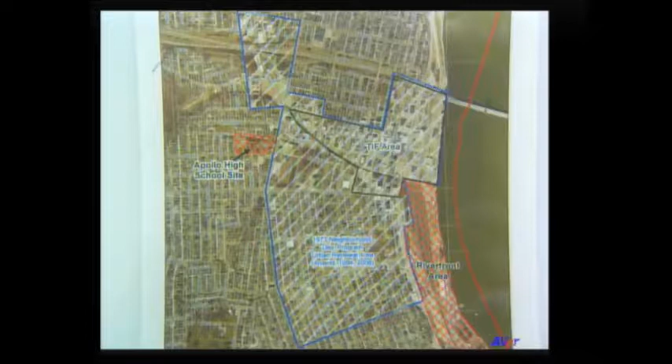There was a discussion at that point about whether that should be for the downtown area or citywide. When we looked at this and presented the area, there were a couple of communities that had something comparable - Davenport would be one. If you look at their policy, the timeframe, the abatement on that 10-year basis, and the percentage by year, this matches that.

They do their downtown corridor, or downtown area, and then they have 2 highway corridors - one extends north out of downtown. I'm not familiar with the other one to say where it is, but what they've done is target areas that need redevelopment. The other communities we saw were typically doing that as well - the majority with an expanded abatement schedule like this were asking how to target areas where development is not occurring, needing something far above the traditional tax abatement.

Even at that time, there was an argument over whether this should be citywide or not. But regardless, when Tim suggested expanding the downtown area, what's up on the board in red hashed would be the idea of expanding that tax abatement plan to include that area as well, and the developer is certainly willing to do that. We don't have to get the tax abatement in place by June 5th, but we do need to be working on it as we move forward.

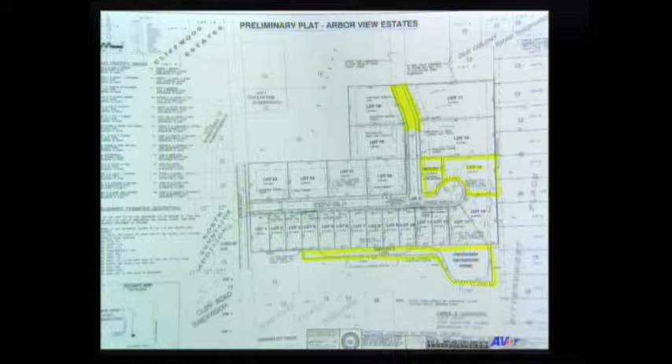Mr. Tisdale: This is a request by Scott Zeiser, developer of Arbor View Estates. This was previously approved for a PUD and preliminary plat last fall and winter to do a new residential development north of Sunnyside off of Cliff Road. He's requesting a few changes to the previously approved plan, which included 14 zero-lot line duplex condo developments where each side of the condo is on its own lot. The 15th lot was a single-family lot with an outlot on the corner of the cul-de-sac, and the road went to the north property line and dead-ended, with a detention pond on the south.

A lot of the amendments to the PUD are based on changes he's requesting in his development. As he got further along in the development stages, doing more survey work and other things, he's requesting to add 2 additional lots on the east side, lots 15 and 16, to the condo development.

That would wrap partly around the cul-de-sac, having lot 17, previously an outlot, become a buildable single-family lot, expanding the detention area to the south on his property to cover all required detention, and having an outlot to the north property line for future street development with a cul-de-sac at that location.

A couple points within the ordinance mean this preliminary plat would have to come back to council as well, but we have to go through the rezoning first to make changes so the plat would conform. So the changes in the PUD ordinance would be going from 14 to 16 attached units on the eastern and southern border of the development, modifying some setbacks to fit within this area, primarily on the front side of the development.

It does get tight around the cul-de-sac, so reducing the front yard setback from 30 to 25 or 20, while maintaining the 25-foot required rear yard setback for lots adjacent to other properties. For lots 1 through 14, shifting the front and rear yard setback: typically the front yard setback on the street is 30 feet and the back is 25. His proposal would change the front yard setback to 25 and the rear to 30, so he's still maintaining the same total setback distance, just with more distance in the backyard.

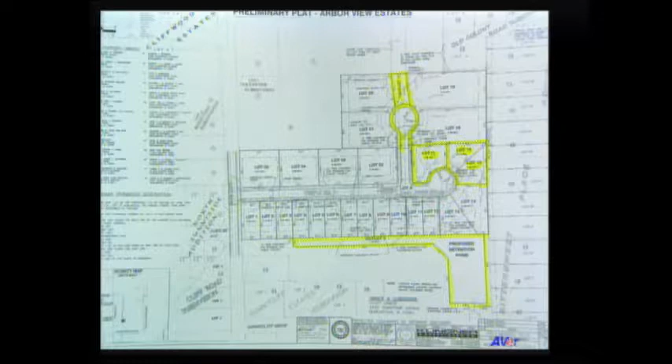It's going to be my question—so it would take an amendment to add that waiver of the sidewalk. But the planning commission, with the changes as shown here, did vote 4-0 to recommend approval of the request to the city council.

Okay, you guys good? I'm good with everything, but I'm not good with the amendment on changing for the sidewalks. So that would take an additional amendment by council to add that in, since it's not currently in the PUD. What was his justification for asking for that?

Do you know? Just reduced cost essentially is the big thing. Yeah, and I talked to him, he talked about it being a low-traffic area, didn't think it was really that necessary. I kind of agree with him. I can understand that. I think Cliff Road currently just has sidewalk on one side of the street as well, so some of the existing neighborhood based it on that.

You guys good? Sure, okay.

Number 7, consideration of an ordinance rezoning the property locally known as 816 Valley Street from M1 Light Industrial to C3 Central Business District Downtown Mixed Use Zoning District, first reading. Mr. Tiffin.

It's a request to rezone the former Dial Building. The portion on the south side, shown here in yellow, is currently M1 Light Industrial. There is a portion to the north that is currently C3, a small portion on Jefferson Street, Central Business District. This rezoning would make the entire property C3 downtown mixed use, which allows both commercial and residential use. M1 does not allow any residential use, so the property could be redeveloped to include residential with this rezoning.

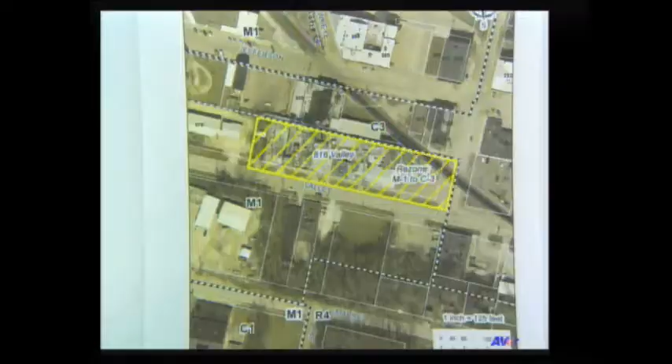So again, just requesting to rezone to allow better reuse of the property. You guys good?

Do you know, do they have a plan in mind? The applicants here are looking to do some residential, different residential uses on the upper stories, at least, I think. This would allow residential or commercial use in the building. Sounds like a good reuse.

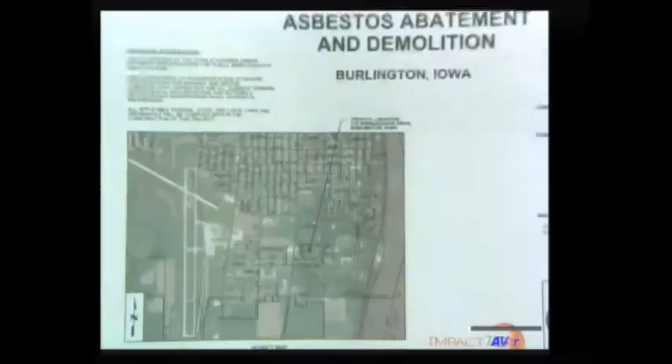Next is a consideration of plans and specifications for the demolition of the property located at 715 Shoquoquon Drive, Burlington, Iowa. This is the former Parkview Care Center located just south of Dankwardt Park off of Madison Avenue and Shoquoquon Drive. The city did acquire this over a year ago, I believe.

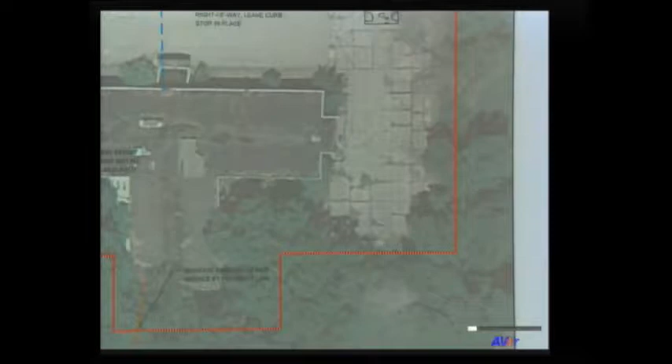We're looking to abate the asbestos and demolish the building, with plans to subdivide into 3 lots for sale as residential single-family lots. Previously, there was discussion about whether to move forward with Apollo, which is kind of why it's been delayed a little bit. Those were going to be packaged as a demo project if that wasn't going to be redeveloped, but since the development came forward, we proceeded with Impact 7G in developing plans for the asbestos abatement and demolition, looking to have bids received by June 1st, 2017, and completion by the end of this year.

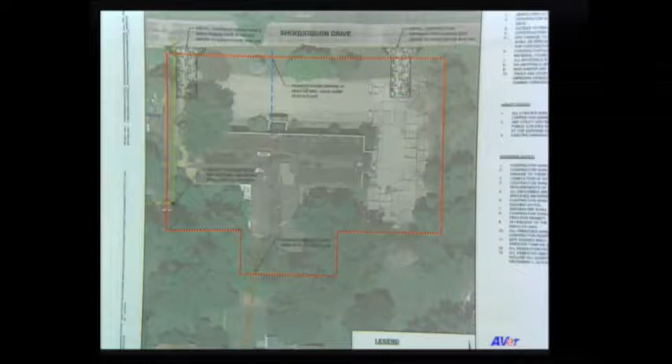Wasn't somebody looking at this building prior, or am I getting buildings mixed up? There's been some inquiries into the building in the past, nothing more than inquiry. Currently it's zoned R1, single-family residential. I don't know that this current use could go back into this area based on current zoning, but it could obviously be considered for rezoning. It's in a state that has a lot of mold, asbestos, and a lot of issues with it.

Cost by Impact 7G shows $391,000. We did have an estimate from a local contractor a year and a half ago, closer to $200,000, so we're going to see what those bids come in at. Currently we have over $305,000 in our fund for these projects.

Okay, council, you guys have any other questions? Good, thank you, sir. Next we have consideration of plan specs for the 2017 Agency Road Widening Project West End.

Just this first one here. So you can see the project boundaries out here. Basically what the project entails is reconstructing Agency Road from West Burlington Avenue out to just short of Highway 61.

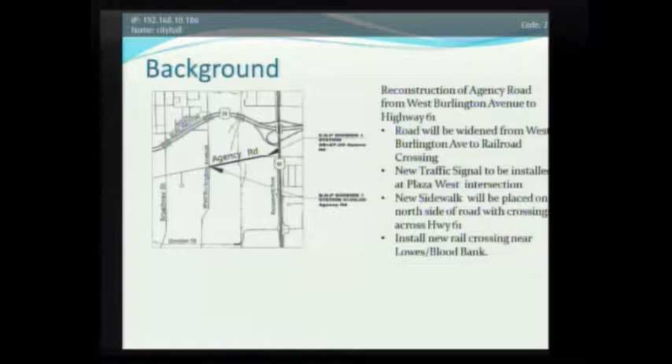A couple of things we'll be doing in addition to the reconstruction that should be noted: the road will be widened from West Burlington Avenue out to just before the railroad tracks where it kind of necks down, so that won't be an issue anymore. A new traffic signal will be installed to replace the temporary one out by Plaza West, which is pretty well needed.

And then we will be installing a new sidewalk on the north side of the road, and we'll actually have a sidewalk crossing across 61 and then down to Walgreens where there's already some existing sidewalks, so we can connect the corridor there.

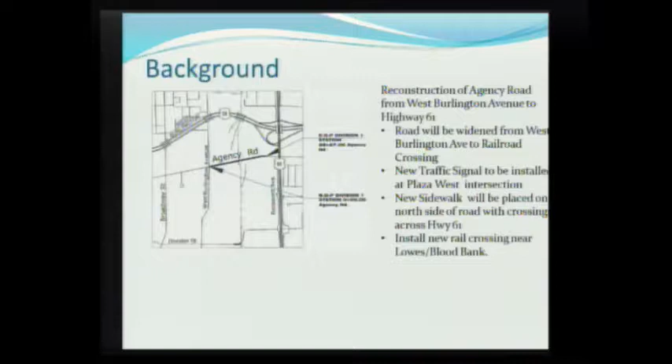Next, and the last thing worth noting here, is we'll be installing a new rail crossing near the entrance to Lowe's and the Blood Bank. The existing one has a little bit of wear on it, but we're replacing it to make it a smoother ride there.

On the next slide I have just a quick picture of what the widening will look like. The darker black line on the top and bottom there is going to be the new road width, so it'll match everything as you move farther to the east. So you'll have 2 lanes in each direction and then a center turn lane each way.

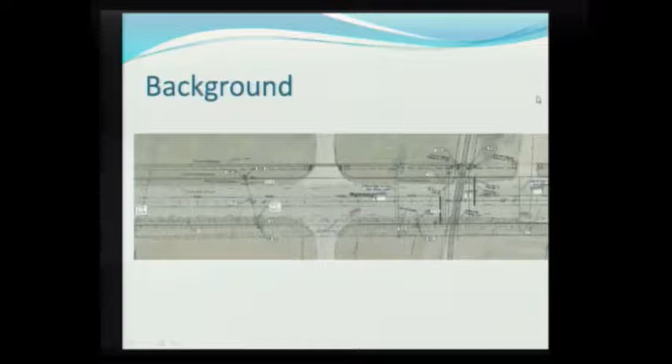The current budget is 1.4 million roughly. We have 2.2 allotted, and that is a RISE program, so it's an 80-20 match. Our portion of that is just under $500,000. But again, if the bids come in less, our match will obviously be less as well.

Our tentative schedule, if everything progresses, is a mid-June letting. We'll receive bids at that point. We would start in early July and then wrap up in early November.

So what impact will traffic have in this regard then? We would have 2 lanes open at all times. So it will be pretty congested in that overlap between when we have the roundabout going and when this is down. Currently that'll be about a month if the roundabout takes its entire duration, but they're making pretty good progress out there, so hopefully we can get that down to a couple of weeks. The sooner the better.

My daughter asked me the other day, 'Who's the new guy with the cool hair?' I told her, 'It's me, it's your dad, you don't recognize me.' She's the first one that said my haircut's cool in the whole office. I just wish I had hair.

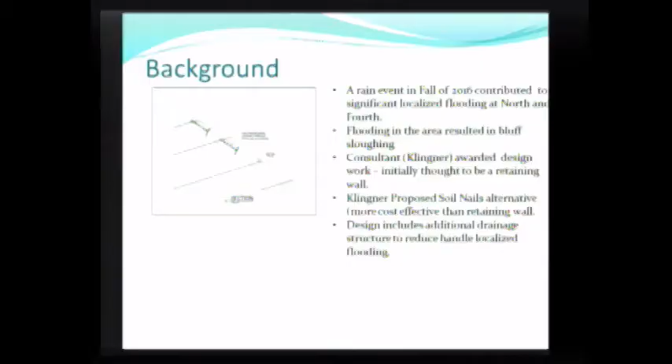This is a project we had a rain event last fall where we had some localized flooding. The water went over the berm, and we had some sloughing, and quite a bit of material washed down the bluff.

Klingner was awarded the consulting position for this design. Initially we were kind of going in the direction of a retaining wall, but they proposed a different option that we were all okay with, and that was the installation of these soil nails.

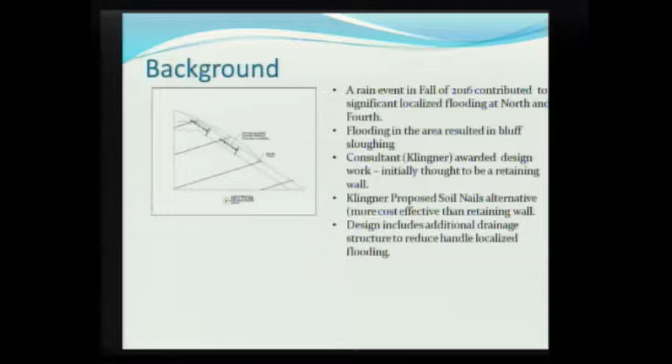Basically, you can kind of see a depiction there. You have basically a really high-tech chain link fence that you're nailing back into the bluff. The nails will be embedded in the rock and grouted in so that they'll be tied back, and then all this fencing will hold the berm up. So that's the direction we're going for this one.

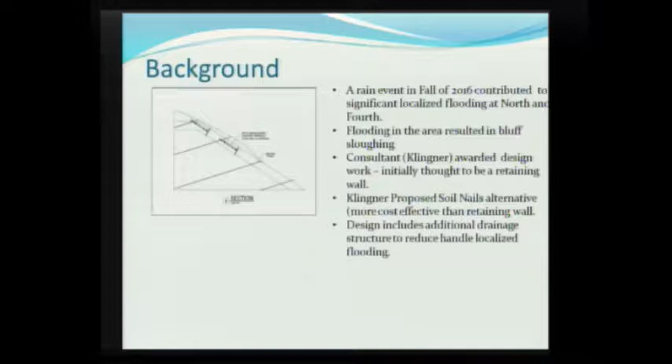You can see here that shaded area down below, you can see where the road goes around. That shaded area is where they're planning on installing the soil nails and the matting.

In addition to the soil nails, there'll be an overflow pipe in addition to the one that's there. So if there's localized flooding, we'll pick that up and bring it down the bluff without all the sloughing and erosion.

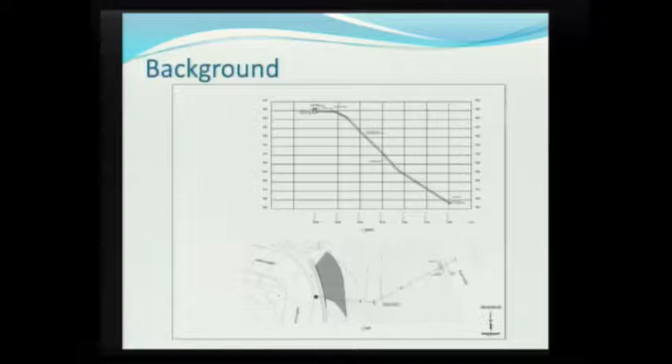Next, the estimated budget for this—I don't know if you guys remember the initial budget for the retaining wall, but it was somewhere around $750,000, over 700,000. This we're thinking is $311,000. Klingner came up with it, so we can't take all the credit. We just kind of steered them that direction when it became an option.

But what does that mean? I don't believe that we had a budget established for this project. That's why I don't have much as far as a tentative schedule, because it's going to be a tough call whether we add this to the budget or figure out a way to get it in there.

It's covered—we have a miscellaneous sewer rehab account, and we did change how much we were going to move over from sewer into the miscellaneous sewer rehab this year because of this project, moving a little bit more than what we had planned. But that's the account we would use for unforeseen projects such as this.

Okay. But again, this was something that we did not foresee having the kind of erosion that we had last fall occurring.

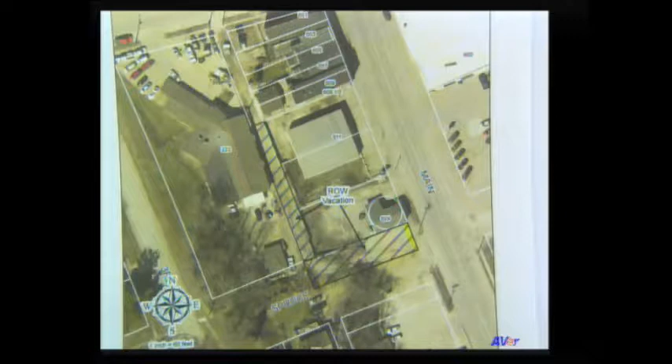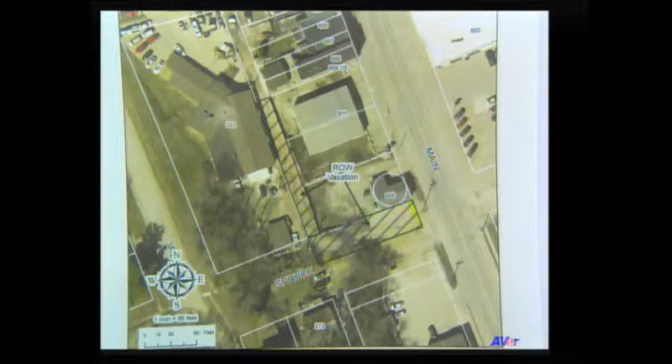You guys got any problems with that? No. Okay, be prepared to waive the third.

Right on. Next, motion for final adoption of an ordinance providing for the division of taxes levied on taxable property in the Deer Point Estates urban renewal area, pursuant to section 403.19 of the Code of Iowa.

No changes from previous readings. Again, this sets up the ability to use TIF for the Deer Point Estates urban renewal area and Deer Point Estates subdivision. We still have a development agreement that will follow, hopefully at the next meeting, to set up the parameters for the use of the funds.

Okay, you guys good? All right, next we have a resolution approving the final plat. Hold on a minute—Nick had information.

Because it was brought up at the last council meeting, I wanted to show a map of the sewer discussion that ensued due to concerns with this development. I don't know if it's appropriate for me to talk about it now, or at the end. Let me wait till the end. That's fine.

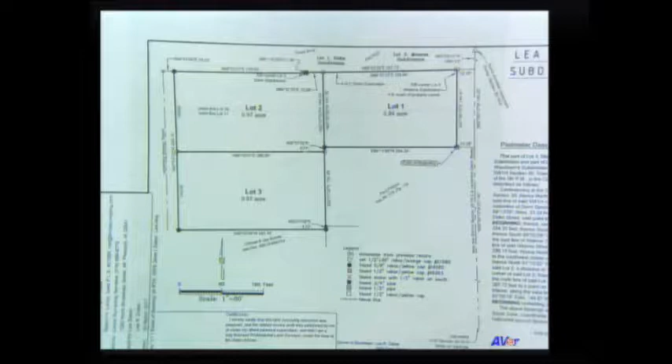This is a minor subdivision, which goes directly to council. We did the review on this development. There were a couple of comments through the development review from the fire department, with concerns about the street on the west side. It's a 20-foot right-of-way, approximately 14 to 16 feet wide, coming up from Mount Pleasant Street. There is no turnaround at the end of the streets, including Dane Street and Weimer Street. It's approximately 1,350 feet long from Mount Pleasant to the last driveway in the north, which exceeds our current requirement of 750 feet, a requirement not established when this development was built, but with this new subdivision.

They had some concerns about that. New construction would be required to meet current fire code and likely require residential sprinkler systems. The street has no turnarounds and is very narrow. During a recent house fire on Domelin, a residential street similar to Weimer, there was difficulty getting equipment to the site due to the narrow streets, and some police vehicles were blocked in. So they wanted to express these concerns based on the size of the existing streets, to be taken into consideration with this plat.

You guys have any questions?

Okay, can we go back, Mayor? Yeah. Which one do you want to go back to? 13? I'm not paying attention to numbers. Yeah, let's go back. You got a point? Yeah, let's go. Well, I kind of want to know where everyone stands, because I have a feeling there's going to be more discussion then than there just was. So I want to know where everyone stands, what you've heard, emails you've gotten, articles you've read.

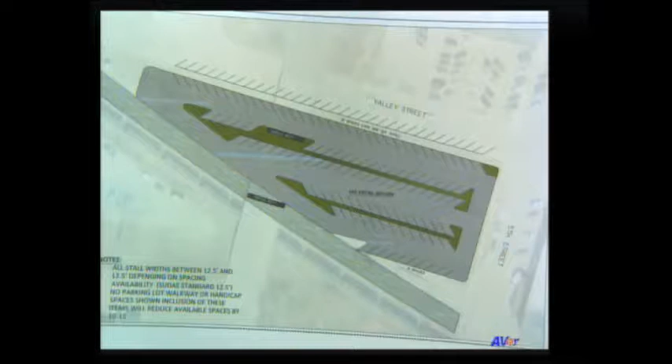This would actually capture probably multiple developments. It's been looked at that there could be on-street parking on Valley Street, and there's space available in the city lot across — I think about 22 stalls. Those parking stalls on Valley Street would be the other direction, the diagonals are wrong, but the immediate part would be Valley Street and the city parking lot. If the city or somebody else was able to acquire the Burlington Northern lot, that's in addition to that — that's the ultimate goal, to get the Burlington Northern lot. We just don't know where we stand on that.

Levi, is that enough to cause you to go forward with just this — the 147 spaces, are you talking? No, I'm just talking about Valley Street and the lot across. Yeah, that's 147 — no, he's talking about just the 65. That previous slide would show it better. Yeah, go back to the previous slide.

So you talked about having two separate buildings you're looking to do, and I think when you came in before, you talked about the Blau and Sons possibly moving forward first. How many spots is that? Is that 50 to 100 on the Burlington Northern? We're talking about the 40 and the 22. The question was, if you did the 40 on the street and the 22 in the lot to the north of it, you get to 62. That might be a little shy of what you need to move forward on the Blau, but it's fairly close, isn't it?

No, we'd probably more like 120 spots total for both. He's saying for both, yeah. We're wanting to do them kind of, you know, there will be one and then the other, but they'll be pretty close together in the phasing of them.

So what you're saying is we need that BNSF. Well, part of our agreement is we're buying both buildings, 170,000 square foot of property, and we'd be moving forward on both the developments simultaneously. One would get done first, then the other, but we'd probably need a commitment somewhere down there of 120 spaces.

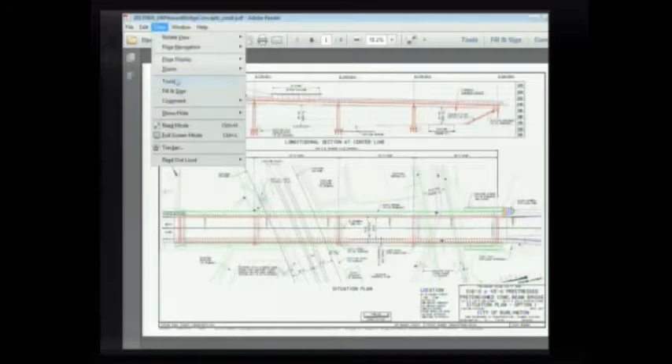Wanted to talk tonight about the Mount Pleasant Street Bridge replacement. Could you bring up on the screen the bridge drawings, the plan and elevation? The bridge that's out there was built as old US 34 in 1942. It's being replaced because it's structurally deteriorating. The bridge is about 500 feet long, 4 spans. What we've got shown there, it's hard, you see a 4-span bridge in plan and a 4-span bridge in elevation. They're pretty close, right on top of each other in terms of span lengths.

The existing bridge is a steel plate girder bridge with 3 lines of girders. The replacement bridge would be 4 pre-stressed girders, 6 lines of them. On the next page, you can see the cross-section through the bridge, giving you an idea of what the new bridge cross-section would look like. We worked with city staff to try to economize this.

The existing bridge has 2 5-foot sidewalks, and it has space that was available for 4 10-foot lanes or 10.5-foot lanes back in the 1940s. We're proposing, working with city staff, we met with them in early April to work on this cross-section as part of your Complete Streets program. There's about 4,000 to 5,000 cars a day across that bridge, and there are alternate routes at grade, and alternate routes on US 34 to the south. So what is proposed here is 2 lanes through at 12 foot, plus 2 5-foot bike lanes, plus 1 5-foot sidewalk on the south side.

The bridge would also have rather conventional lighting, and we're trying to give you the basic Iowa DOT standard bridge that would meet the function of crossing the BNSF Railroad and Osborne Street and staying within the existing right-of-way and meeting the budget. That's our main goal with this project.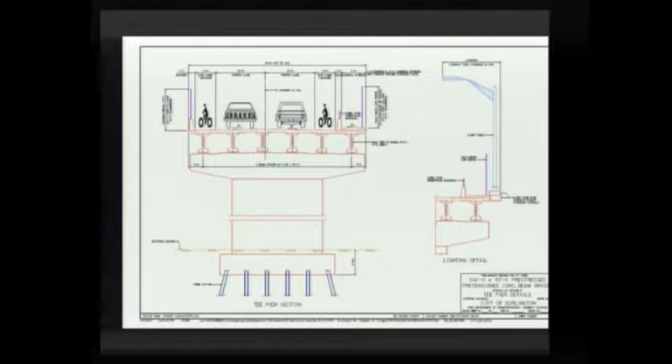So, any questions about the general arrangement of the bridge? It's fairly straightforward. If you've gone down US 34, it's going to look pretty much like what you got there. Right on. Okay.

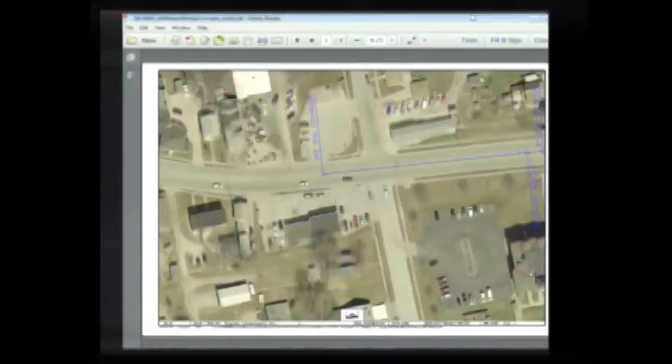Then I guess if you could switch to the aesthetics. I was asked to make that. Go ahead and show the pictures of the bridge. Just wanted to give you some basic ideas of what a standard bridge looked like and what a little bit of an upgraded bridge would look like if you were to choose to go forward with any aesthetic options.

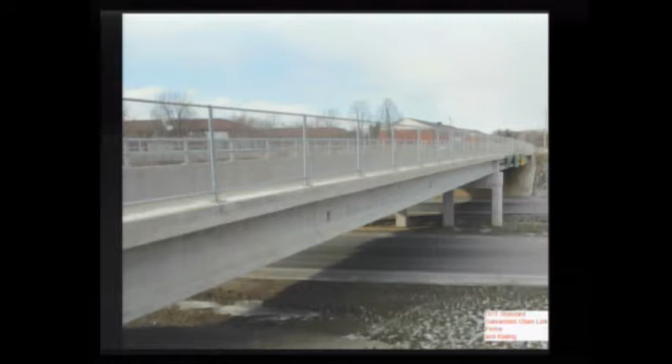This is a standard DOT bridge. This was Lincoln Road over I-74 over in Davenport. What basically you get is a chain link fence and some galvanized steel on top of some concrete, a very basic looking structure. Next, please. So that's a good example of what you got, the Iowa DOT basic standard structure. It meets the minimum safety requirements.

Next, if you could back up for one, that's a 6-foot tall chain link fence. Purpose of that is to provide safety. It's over the interstate; in the case of the Mount Pleasant Street Bridge, it's over the railroad tracks. The requirement there is increased.

You have to have a 10-foot tall chain link fence over the railroad right-of-way, and we can't put any piers or any obstructions in the railroad right-of-way. So we have to stay totally out of the railroad's way.

Next slide, please. Okay, this is kind of an upgrade. You would basically just have a vertical picket fence, something with about the same functionality, about 6 foot tall. It would be taller, and over the railroad, there's a requirement for 2-inch square mesh, basically to keep people from pushing things through. It's a railroad safety thing.

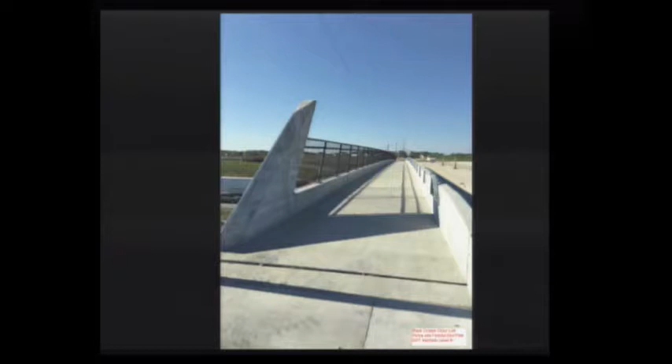Next slide, please. So that's more of the basic look of a picket fence on a railing, some pretty basic aesthetics. Next slide, please. That would be an upgraded version, that's out in Des Moines. That's kind of the next category up.

What we're aiming for, DOT has what they call aesthetic level categories. D is the basic bridge, C is one step up, and B is something like you might have on a corridor or something like that. So if you could turn to the renderings, please.

We were asked by city staff to come up with some ideas of what, if council were to choose to add some aesthetics to this bridge above and beyond the basic DOT bridge, we came up with. Our landscape architects introduced, over the taller section would be over the railroad tracks.

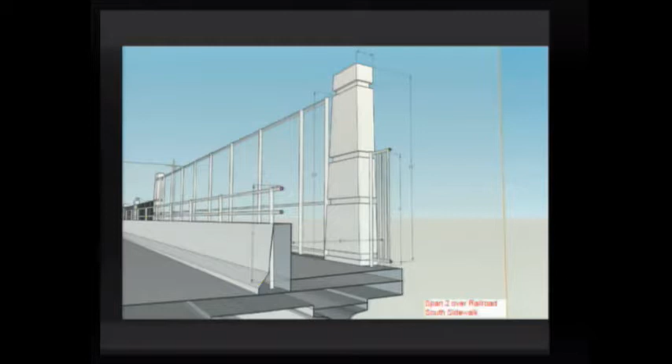That would be 10-foot tall, and they don't show the chain link mesh, but that would probably be some coated chain link to meet the railroad's requirements. And then it would be a vertical picket element elsewhere.

Next slide, please. So these are just to give you some ideas. That's in the 6-foot section. The concrete pilaster just tries to give you a little bit of visual interest there.

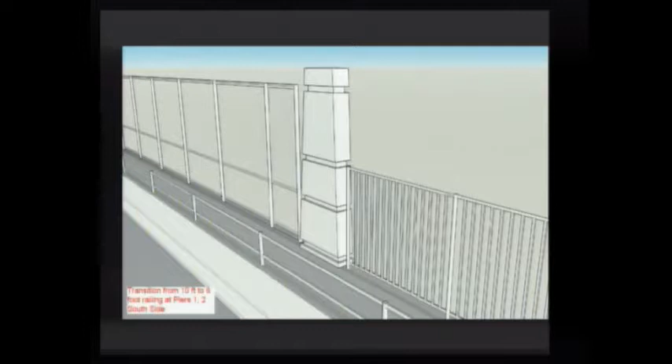Next slide, please. So that would be what the transition would look like. A couple more slides. And I think the last one gives you some general perspective of what that bridge would look like.

So what we'd be shooting for with the DOT aesthetic category C would be a midpoint of about 3% increase in construction costs, with a range of about 1 to 5%. So that's essentially what you'd be getting: some extra cost in the railing and then some concrete elements if you chose to go forward with that.

Are you saying about 100,000? The total bridge project was a little over 5 million. So at 3%, that would be about 50,000 per percent, so at 3% that would be about 150,000.

In order to make a really relatively accurate quantity takeoff, we didn't do this at square foot, we did it from the bottom up at this stage. It was kind of unusual at preliminary design. We had to take a good hard look at the quantities.

So I gave the city staff a bill of materials with our estimate for each line item. There's about 50 pay items on there. We're at about a 15% contingency right now, and we're right near the available construction budget. So if you chose to go forward with the aesthetics, it would be on top of being right at construction budget right now.

Isn't this the closest design to the design we have on 6th Street Bridge? I'm not familiar enough with 6th Street, but I'm a bit familiar with Washington and Central. We're going with a fairly different look for that. What we were aiming for was basically a conventional upgrade, pretty much like 6th Street Bridge.

The upgrade, we're saying 3% probably, right? Probably, that's what we're shooting for. If you were doing it as a bid alternate, your extra design fee would be 10,000? 16, I think, was what we put in the contract. So if you're talking about a bid alternate, you're going to spend 16,000 to have that.

There'd be a 16,000 difference from the chain link fence to the upgrade? No, that engineering cost would be about another 16. The difference between the design from putting up the chain link fence is 16,000. The total construction cost is about $4.5 million.

That's what we're estimating at this time. The 3% of construction cost would be the additional upgrade to do that, so that would be another 150,000. So we'd rise from $4.5 or $4.6 million to 150,000 more on top of that. I caught that, I just wanted to make sure I understood there wasn't going to be $16,000 to present something to us.